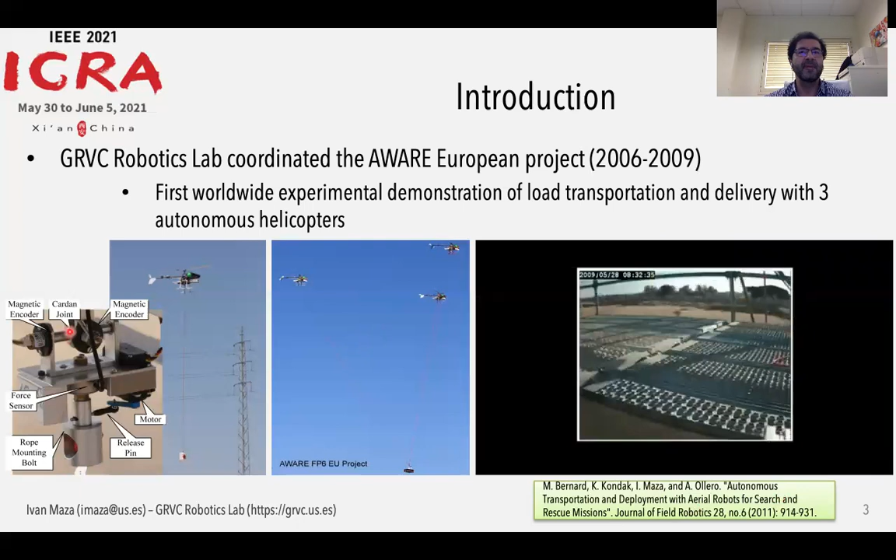You can see in the video how the drones transported a camera to the top of a metallic structure. Here on the left, you have the detail of the mechanism on board each drone to measure the force generated by the load during the flight, in order to compensate it properly, and also the release mechanism for the rope once the delivery location was reached.

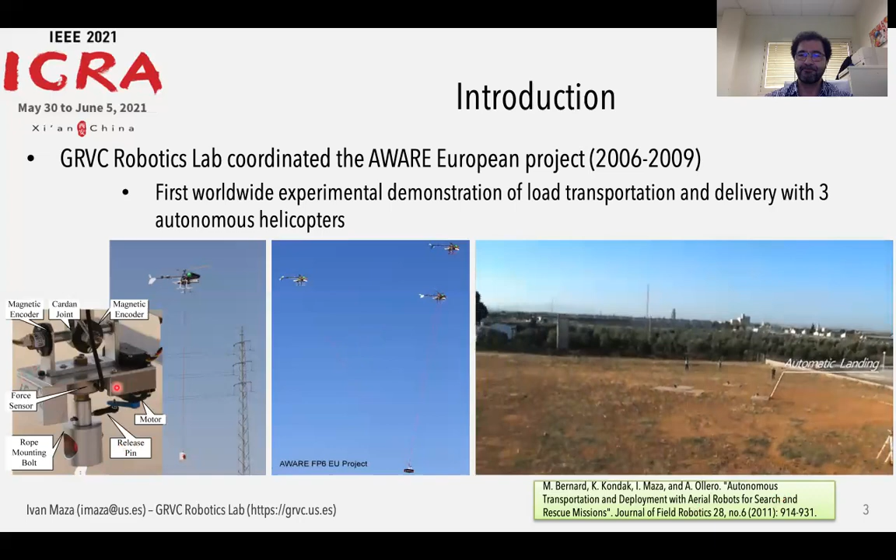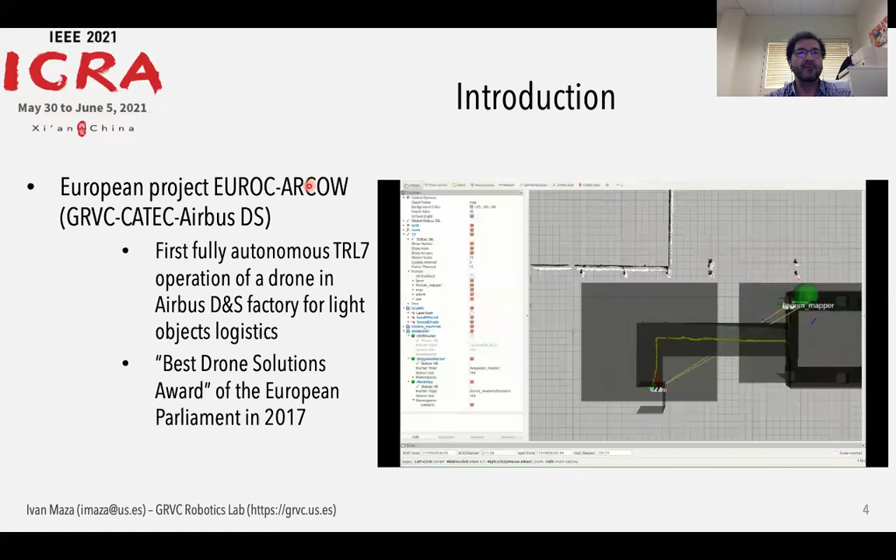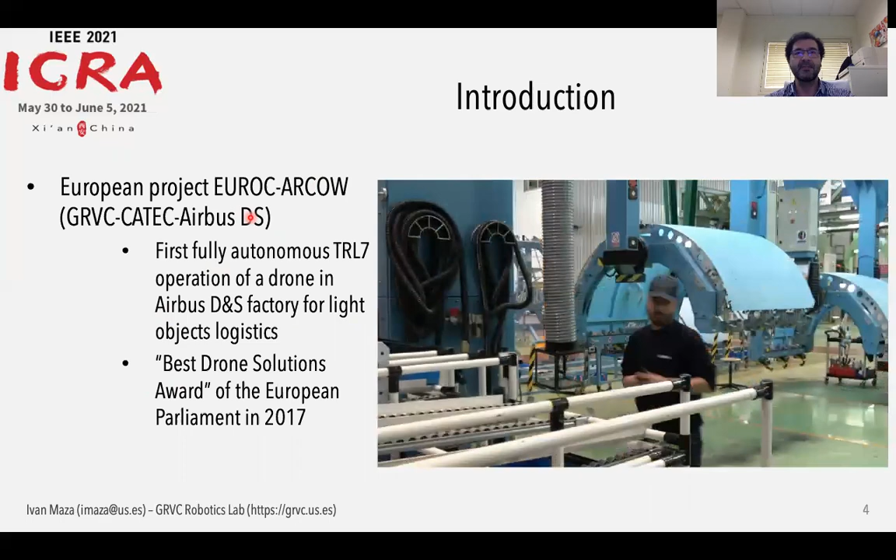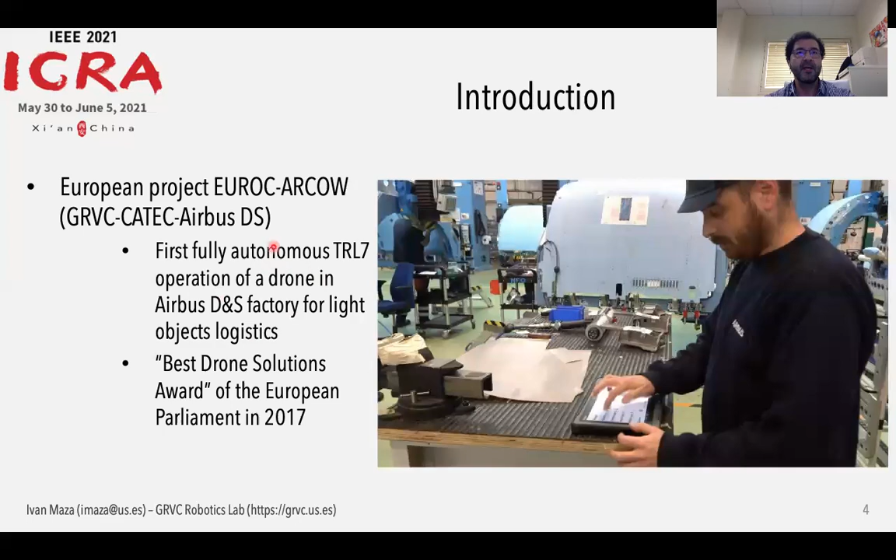Later in 2017, we participated in the ARCOW project with a use case focused on light item logistics in a factory of the aeronautics sector. The assembly of aerostructure parts requires many different materials and small, light components below 500 grams, such as rivets, sealing materials, glues, etc. Our system was extensively validated in an Airbus Defense and Space Factory in the south of Spain, and we received the Best Drone Solutions Award in 2017 of the European Parliament.

In the food industry, there is a favorable size-to-weight ratio of food items, and the short travel times of UAVs is relevant for fresh food meal delivery. And finally, in healthcare and emergency services, given the small size, the limited weight, high value, and high urgency of medical supplies, such as blood samples and medicines, drones are a promising, efficient mode of transportation for these items.

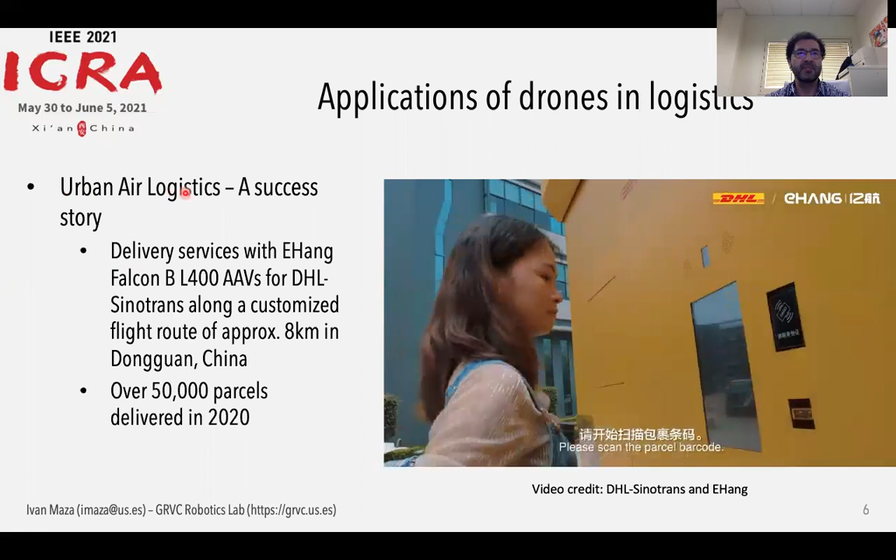Here we have a success story in urban air logistics for a joint venture between Sinotrans and DHL with an autonomous air vehicle of the Chinese company EHang. It is a fully automated and smart aerial delivery solution to tackle the last mile delivery challenges in urban areas of China. Here you can see on the right a video showing the operation.

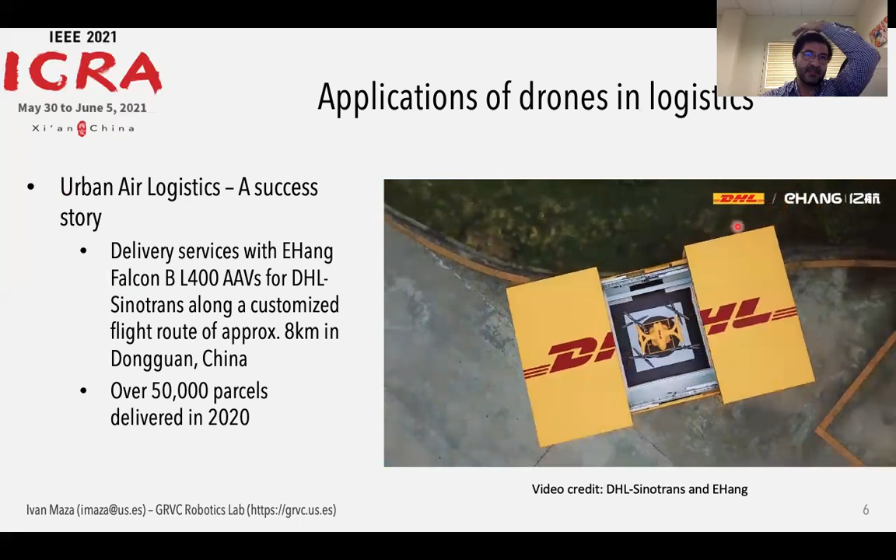The EHang Falcon drones, which can carry up to 5 kilograms, take off and land, as you can see, on top of intelligent cabinets that were specifically developed for the fully autonomous loading and offloading of the shipment.

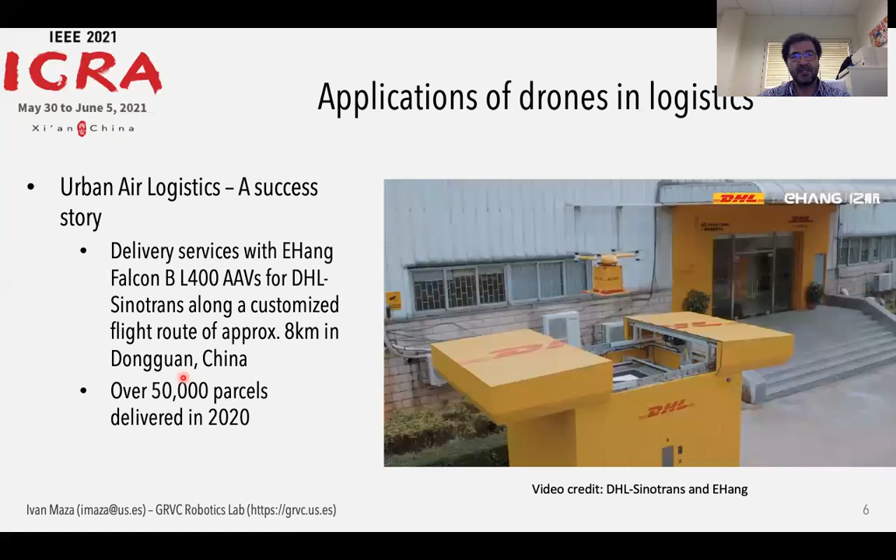The drones are controlled via EHang's command and control center that closely monitors the entire drone flight path to ensure the safety and reliability of every flight. And they have delivered over 50,000 parcels in 2020 along a customized flight route of around 8 kilometers in Dongguan, China.

Drone deliveries have started to gain more and more attention during this pandemic. Drones brought COVID testing samples to laboratories, which helped the quick diagnosis and quarantining of infected citizens. And drones were used also to safely transport medical supplies into hospitals where COVID patients were being treated.

During China's COVID outbreak, drone operators and the Chinese government accelerated their national pilot programs. And in the United States, to facilitate a wider implementation of autonomous drone delivery, the Federal Aviation Administration, the FAA, granted drone waivers to help fight the pandemic. In addition, 10 UAS received airworthiness criteria for certification from the FAA, the next step towards integrating small UAS into the United States airspace.

Here we have the list of companies, and this is a crucial step to enabling more complex drone operations, including package delivery. Here we have several nice examples. On the left, Zipline, a California-based drone delivery startup, delivers critical medical supplies such as masks, test samples, and blood products in Ghana and Rwanda.

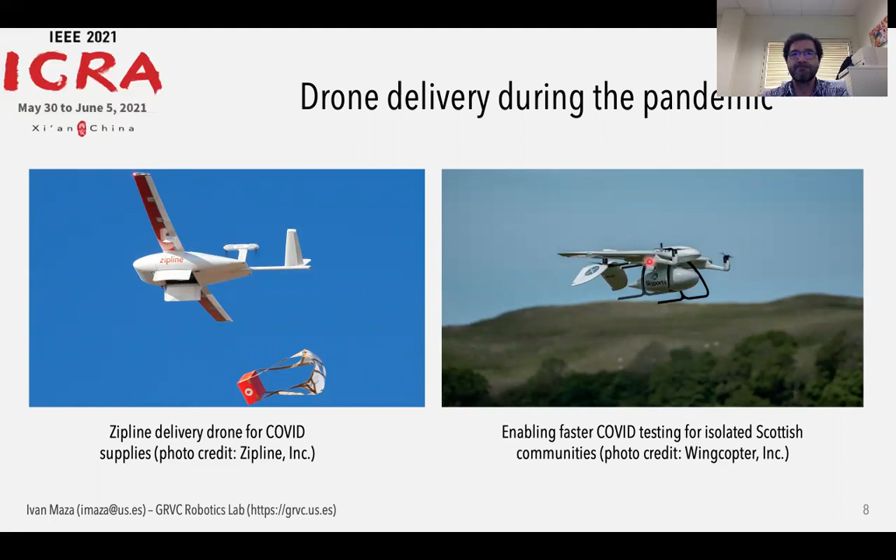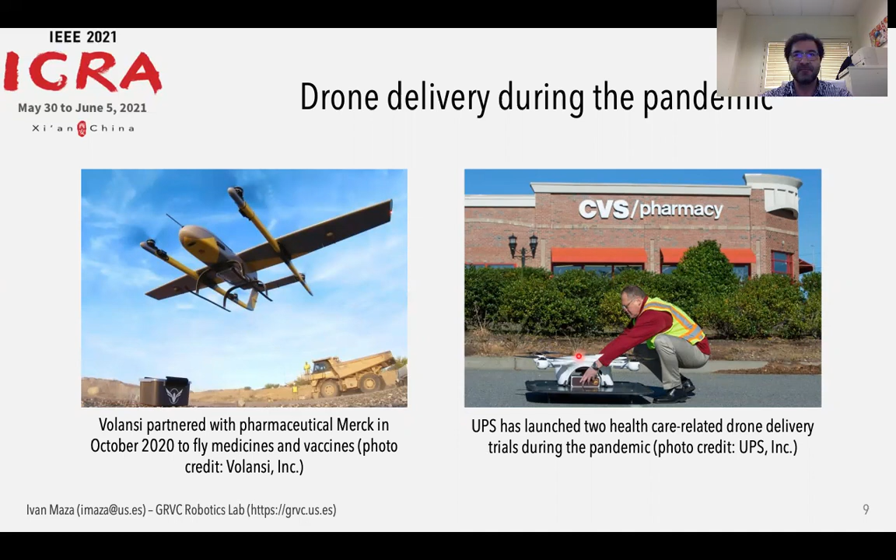Here on the left, Volansi, a San Francisco-based startup, partnered with pharmaceutical giant Merck in October 2020 to fly medicines and vaccines from a Merck manufacturing facility in North Carolina to a nearby health clinic with unmanned autonomous drones. And on the right, UPS has launched healthcare-related trials during the pandemic to deliver prescription medication from a nearby CVS in Florida with a Matternet M2 drone, and also to offer fast shipping of time-sensitive medical supplies in North Carolina.

Here we have another success story that will be inspiring for startups. Wing is a subsidiary of Alphabet, but quite independent, though they use many tools from Google, a sister company. Their main business is to deliver packages by drones, and Wing has delivered food and supplies during the pandemic, allowing people to stay safely at home. They have activities now on 3 continents, and have performed safely more than 25,000 commercial delivery flights, but they claim that in a year this number can be multiplied by 5 or 10, since the business is working pretty well.

In Finland and Australia, they have used SORA methodology, and in the USA, they were the first company to receive a Part 135 air carrier certificate from the FAA for commercial drone operation out of the line of sight of the pilot.

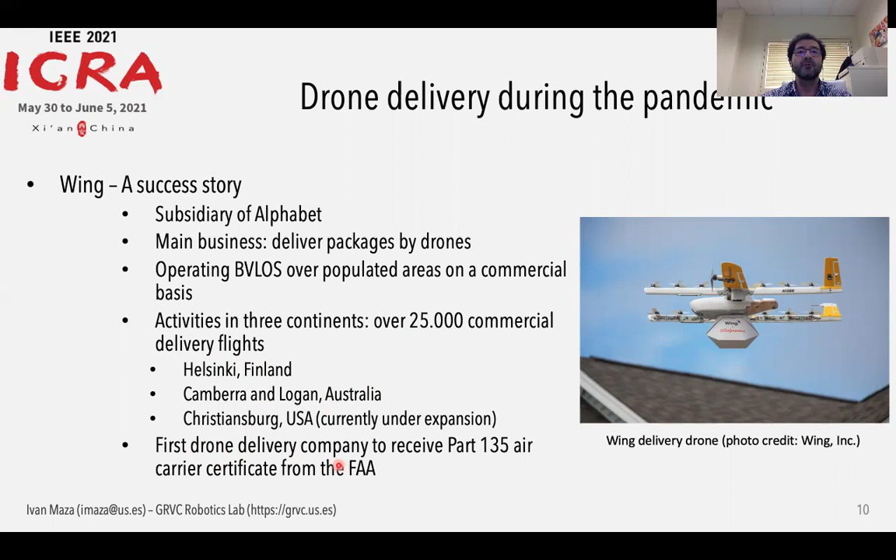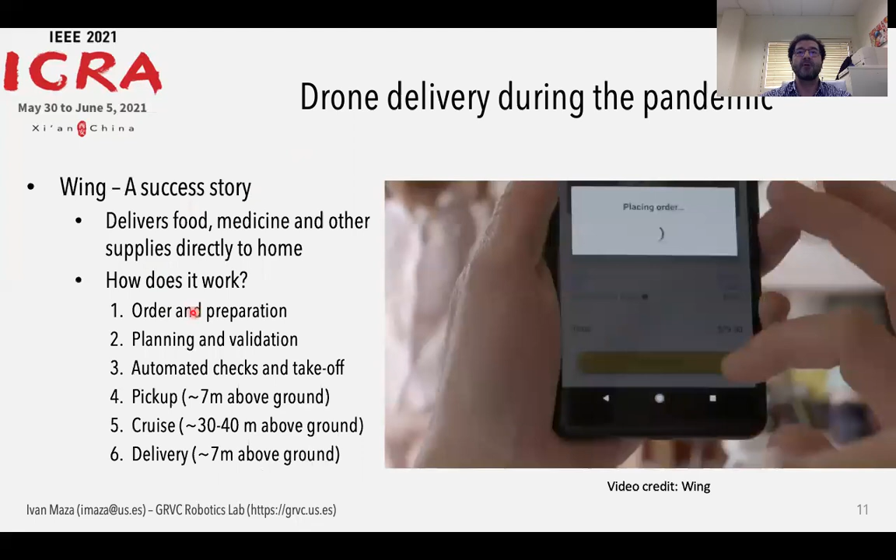How does it work? First, the customer orders through a mobile app that allows them to select the product in a couple of clicks, and then the goods are packed in a special container, and when it is ready, the aircraft is sent to pick up the package.

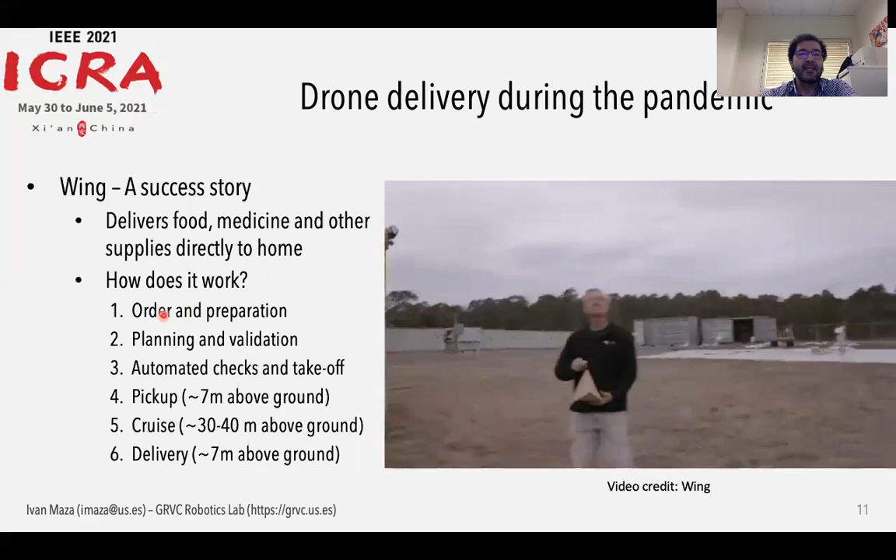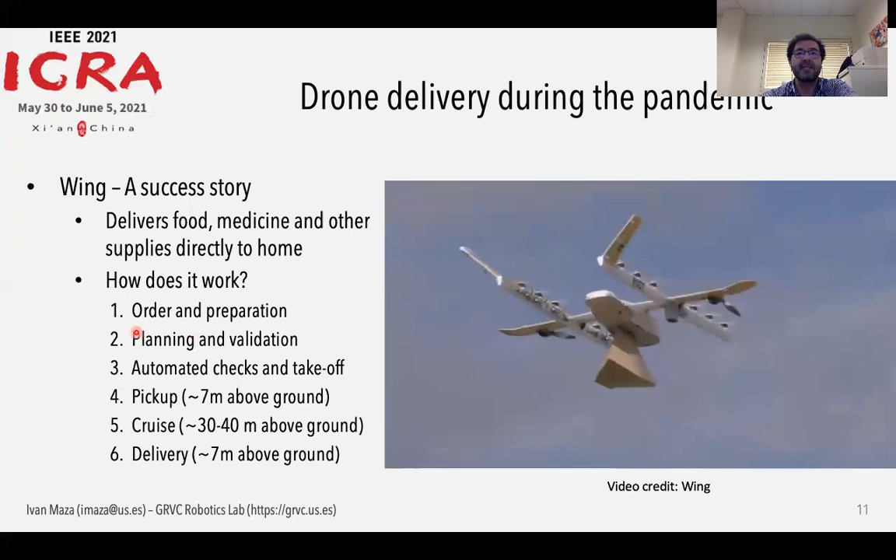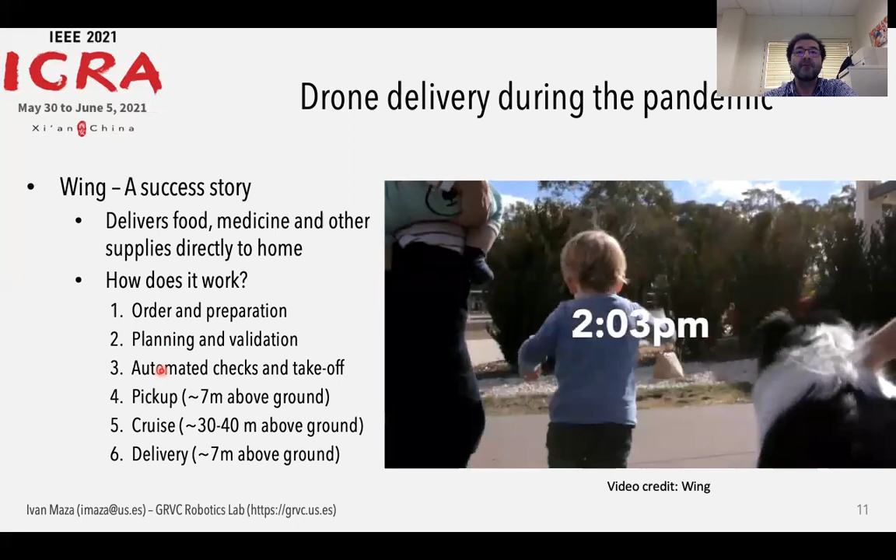In parallel, a safe route is planned autonomously from the nest place of the drone to the pickup location and to the delivery place. It takes into account weather conditions, airspace restrictions, obstacles, aircraft performance, operational requirements, and other Wing drones in the area. Then automated checks are performed before takeoff, and if something fails, the mission is aborted for that aircraft and another drone is selected.

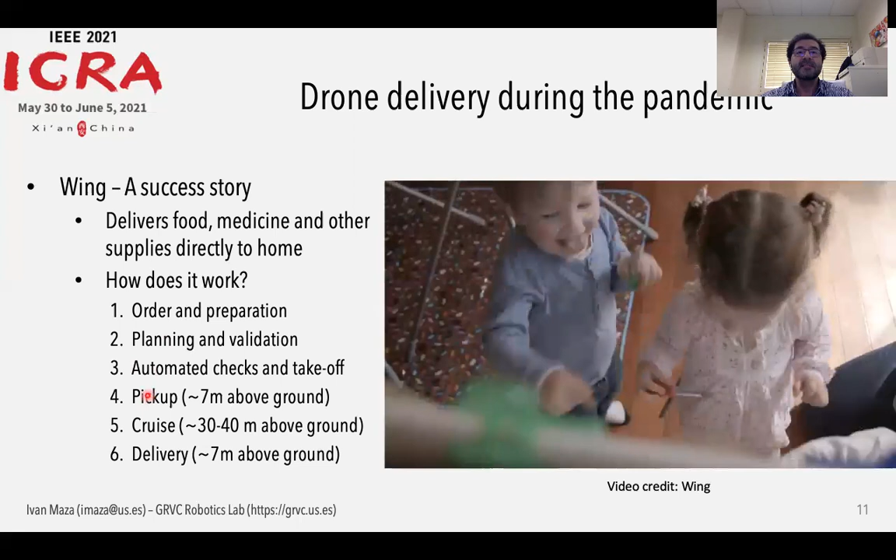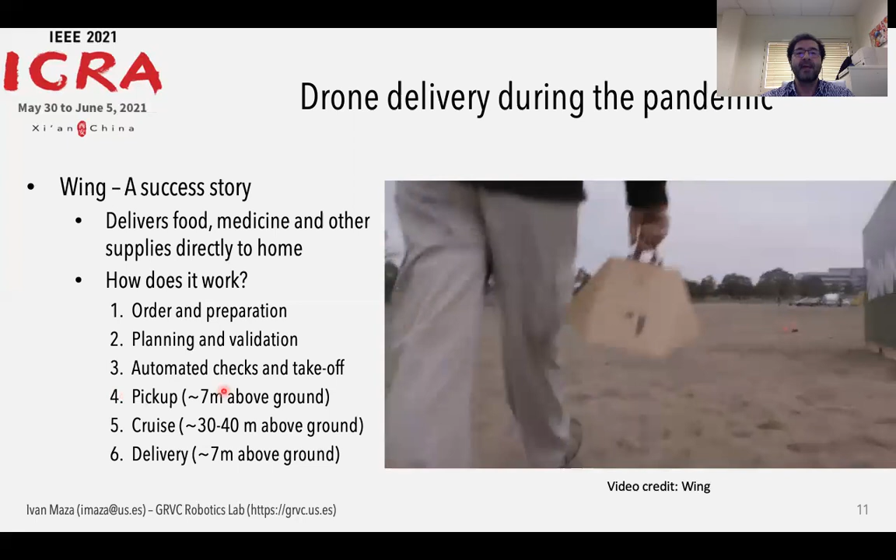Then the aircraft takes off from the nest, goes to the pickup location, and hovers at 7 meters above ground or obstacles, and releases a tether with a hook to take the package, as we will see in the video on the right.

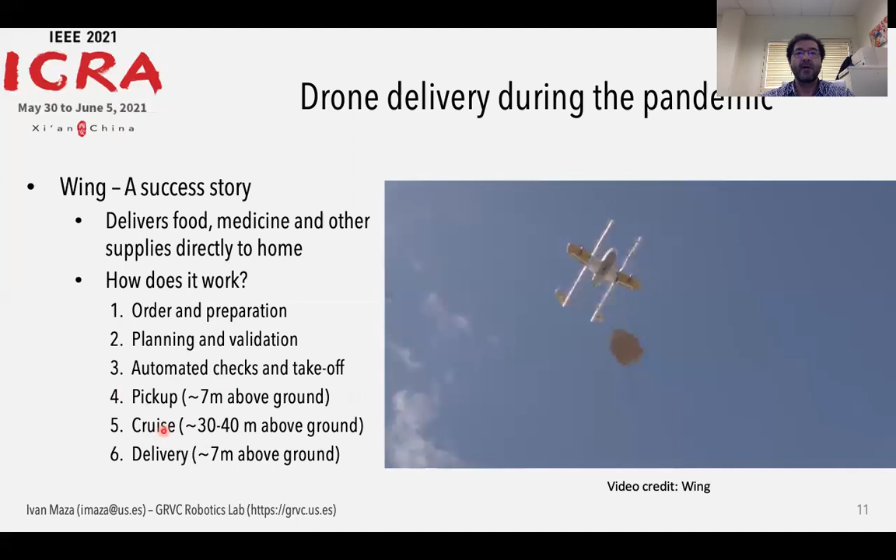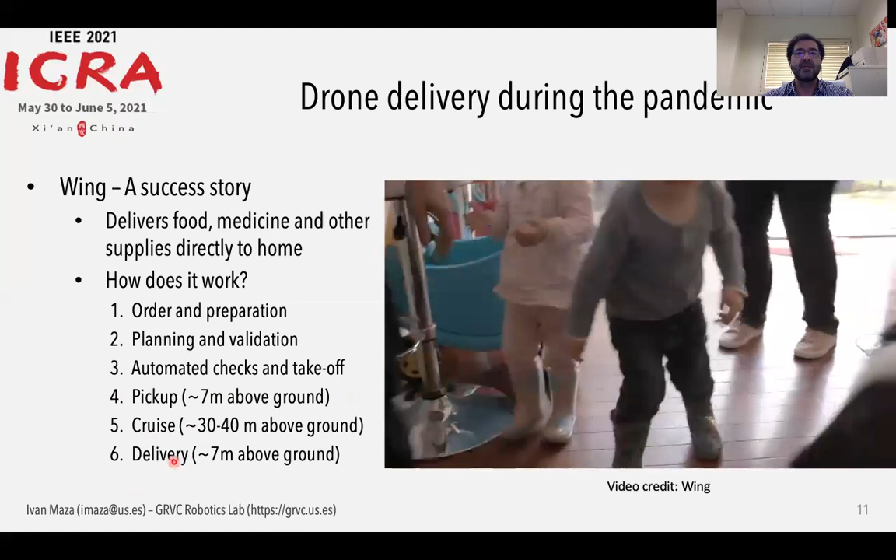Then the aircraft flies at 30 or 40 meters above ground or obstacles and has a range around 10 kilometers. Finally, the package is automatically released, hovering again at 7 meters above ground, and the Wing aircraft goes back to the nest for recharging batteries.

Now we'll move to the conclusions and some recommendations for startups in this sector. According to the different examples shown before, drone delivery is a safer, faster, and cleaner alternative to transport by roads, connecting our cities and reducing traffic emissions and road accidents.